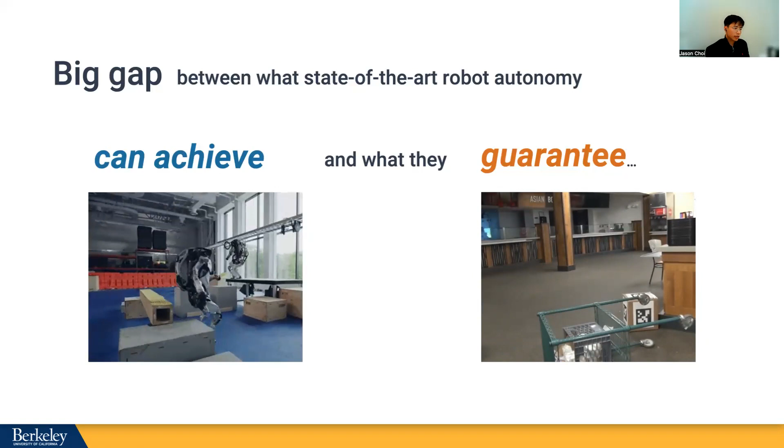I think for the audience of this class, I don't have to spend too much time motivating why safety is important, but this is just my short statement of why I want to work on safety problems. Working on robot autonomy is really exciting these days because you can see robot autonomy achieving a lot of cool tasks, like the videos Boston Dynamics have. But I think a crucial gap that is missing, and the reason we don't see a lot of robots around us until now, is the gap between what robots can achieve and what they can guarantee. I'm not sure if this video already played.

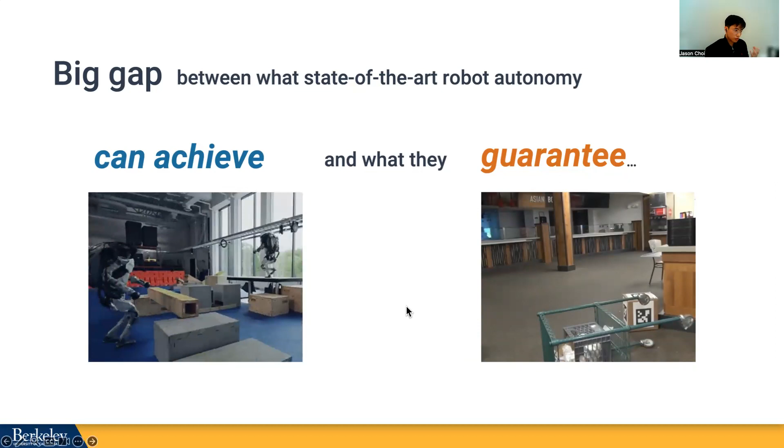To be fair, these videos are both quite outdated now, and these clips are just to make my point. A lot of the time people try hard to make some task achieved, but then sometimes they can achieve it, and sometimes they cannot—sometimes they violate safety constraints. This gap between what they can do and how reliably they can do things is the main impediment to the success of robot autonomy.

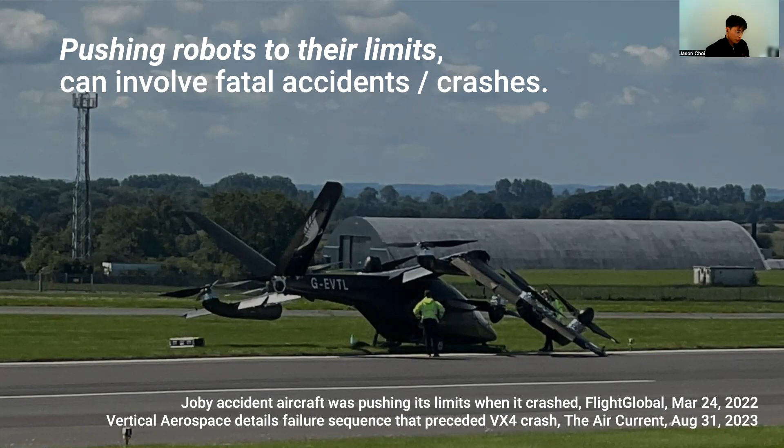I also work on control, or flight autonomy problems, with NASA these days, but there are these new generation eVTOL vehicles which involve more complicated aerodynamics because usually these vehicles have some changing configuration. They have a vertical propeller when they take off, and then this propeller tilts down when they transition to cruise mode flight. When these vehicles are pushed to their limits, they're much more vulnerable to failure, and these kinds of accidents do happen for these vehicles. So guaranteeing safety for these vehicles is really, really important because they are safety critical, and it costs a lot of money for the companies.

So safety assurance for advanced robot autonomy, I think, still remains an open problem. This has been my core research statement throughout my PhD. There are many aspects of advanced robot autonomy, but today I want to focus on two aspects of it.

First, the complicated and uncertain dynamics of the robot—these days robots are becoming more and more complicated. Second, data-driven methods are being deployed more and more for decision-making in robot autonomy. Data-driven methods are, of course, already used a lot for perception and prediction, but they're also being used for decision making. I'm also going to talk about why they have to be used for decision making later in my talk.

So when we incorporate these data-driven, learning-based methods for decision making, how do we ensure safety? That becomes a really challenging problem. These two aspects are the main aspects I want to focus on today.

My talk will consist of two components. The first being control theoretic design—there will be no data-driven components here. There are various methods proposed in the community to achieve safe control design, including Hamilton-Jacobi reachability, control barrier functions, and predictive safety filters. I don't think I'll have enough time to cover all of them rigorously, so I want to focus more on the outlook, the overarching view of these methods. This is based on the survey paper I wrote with Melanie's group and Professor Aaron's group.

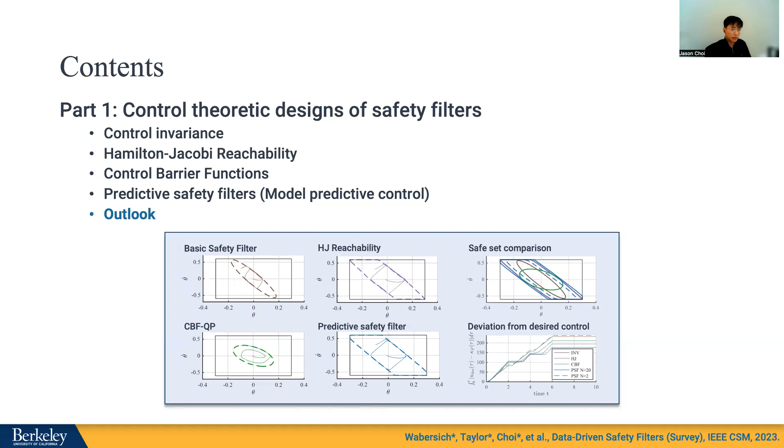The second part will be more about introducing my research—the data-driven component to deal with the uncertain dynamics of the robot. I'll talk a little bit about the GP-CBF SOCP safety filter, and I'm going to spend a bit more time introducing my new work on the discriminating hyperplane-based safety filter. That will be the last part of my talk, and then I'll wrap up with some key takeaways.

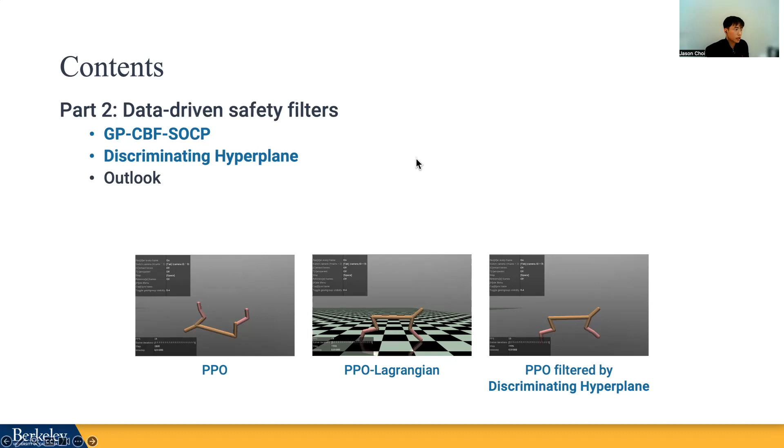So the first part of the talk will be control theoretic designs of safety filters. This is a collaboration with Kim Wabersich and Professor Melanie Zeilinger from ETH, and Andrew Taylor and Professor Aaron Ames from Caltech.

So safety filter—I guess I have to first explain what a safety filter is. In a word, it's a module in the control system that filters out any unsafe action and only applies safe action to the real system.

There might be some other module, logic, or algorithm that determines what is the desired control action the robot wants to take. It can be a learning-based policy, it can be some MPC controller, it can even be a human command. And the safety filter always lies as the last layer of this decision-making pipeline.

And if that desired control is for some reason unsafe, it overrides it with a safe action. So that's the role of the safety filter.

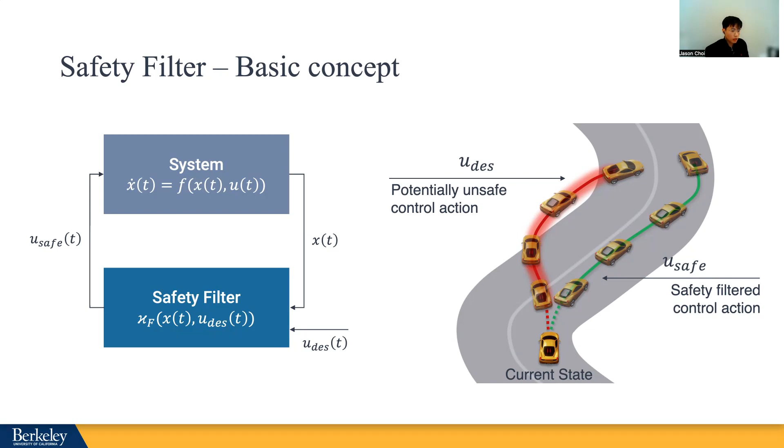I'm going to just try to mathematically formulate what this filter does.

There are three key objectives of this filter. The first one is, because it is a filter, it tries to minimize deviation from the desired control. Because if the override is too conservative, or overrides too much, it might deteriorate the performance objectives of the control. This is a very critical issue with safety filter design, but it will not be the main focus of today's talk.

My main focus will be more on how we ensure the safety constraints. This is the main role of the safety filter, which is to make sure that the state at all times satisfies the safety constraint specified by the designer.

So this can be a constraint because the robot doesn't want to collide with others, or for a flight vehicle, a constraint because the vehicle doesn't want to lose its stability or things like that.

And finally, the robot always has to take action that is only physically feasible, so it has to select its action from an admissible control signal set. So these are the main components.

One last comment about the safety filter is that I'm not trying to propose this as the single way of approaching the safety problem, because in a lot of cases, performance objective and safety objective have to be considered together. But for today's talk, where I want to focus on the safety problem, the safety filter gives us a nice framework where we can think about the safety problem decoupled from performance. So the safety filter has some way of minimizing its deviation from the performance goal, but still prioritizes safety.

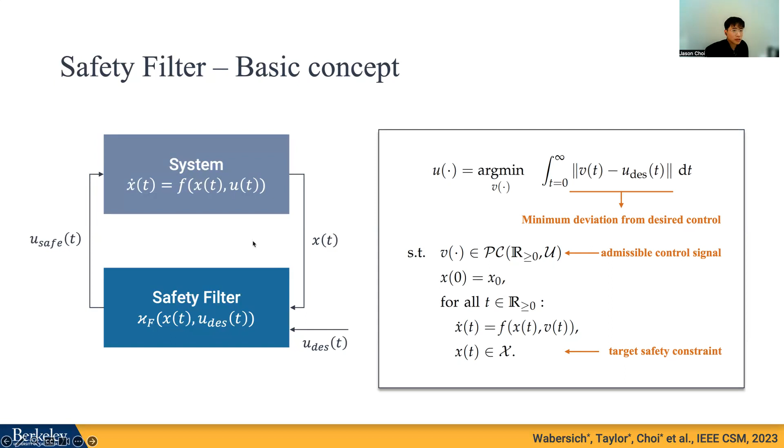So the next thing I want to discuss is how we design these safety filters. From my point of view, there are fundamentally two problems when we design a safety filter.

The first problem is verifying a set of safe states. The designer gives you a safety specification for when the system is unsafe and when it is safe. The naive approach is that as long as the set is given as set X, whenever you're not outside of this set X, you're safe. But actually, that's not the case, because there are some states inside set X where exiting the set X in the future is inevitable.

So right now you're still inside this set X, but whatever control action you select, at some point in the future, those states might lead you to the failure region. So the main goal has to be ruling out those states, and to come up with a subset of the target set X, denoted as S, that is verified to be safe. That's the first problem.

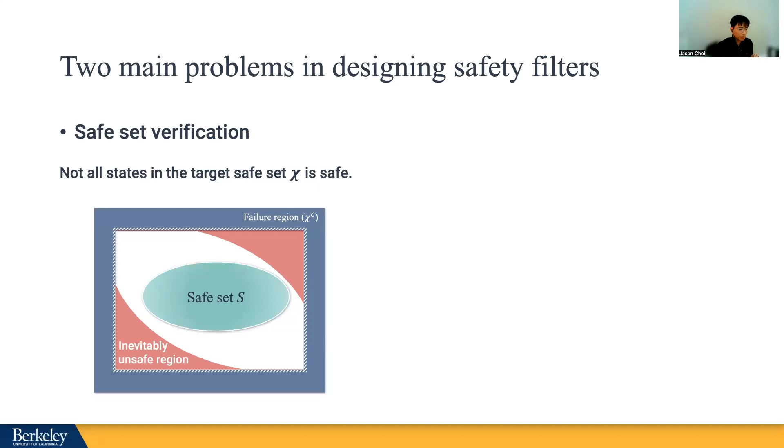The second problem is then, once we verify this set, how do we achieve this through control design? It can be a control design, or a constraint applied to the control input, which is more the case in safety filter design. These are the two main building blocks for designing a safety filter: on one hand, we verify the domain in which we can remain safe, and on the other hand, we select a control signal that achieves this. So we'll think about the safety filter design problem by distinguishing these two problems.

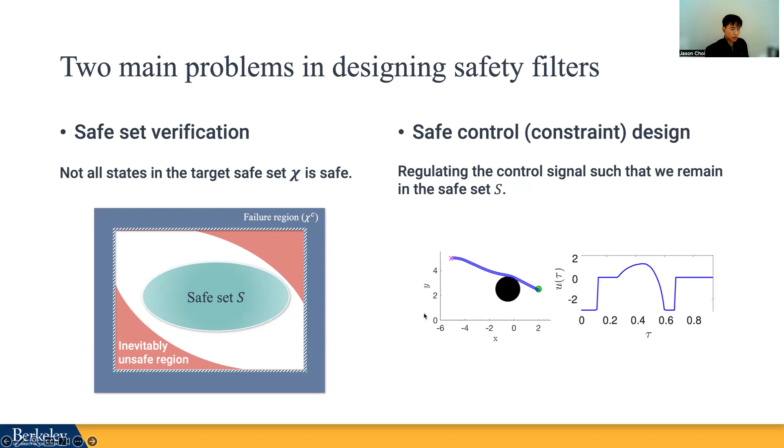So what would be a good candidate for the safe set S is where the notion of invariance emerges. Set invariance is the most fundamental principle to ensure safety and to design this safe set S. I'll first give you a definition of forward invariance, control invariance, and Nagumo's theorem.

Forward invariance is defined for a closed loop system or an autonomous system where there's no control, or the controller is already specified. If there's a set S, and for all initial states inside the set S, the trajectory stays indefinitely inside that set, then you can call that set a forward invariant set. Basically, the trajectory starting inside that set remains forever inside the set.

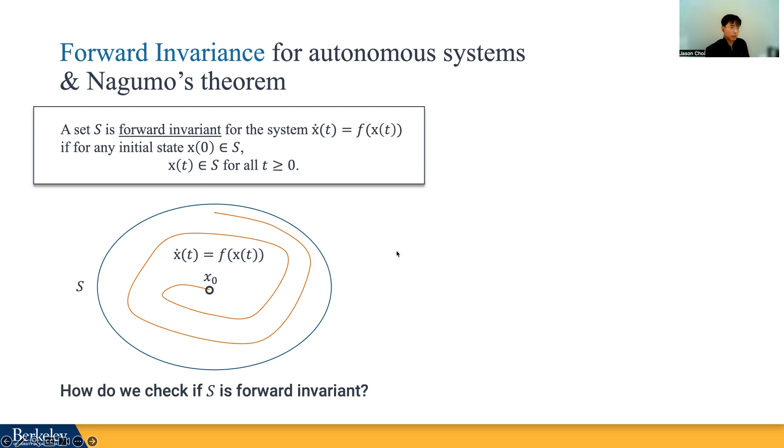A nice way of verifying whether a given set is forward invariant is to check the boundary of the set. When we check the boundary, we get help from an implicit distance-like function that describes the set, which you can call an implicit function, or a signed distance function. Given this function h, the set S is described as the super zero level set of h. So when we check the boundary and check the derivative of h along our dynamics f...

...if this derivative is always greater than or equal to 0 on the boundary, then because of this derivative condition, once the trajectory hits the boundary, immediately at the next time h has to be non-negative, which means the state will still be inside our super zero level set, which is our set S. So that gives a principle that the trajectory will remain inside the set, and this could be a condition we use to verify whether a set is forward invariant or not.

This is called Nagumo's theorem in the literature, and this condition is called Nagumo's condition. In the end part of my talk, I'll come back to this condition, so it will be quite important throughout my talk.

And also, as many of you who are already familiar with the concept of control barrier function might know, this is also very useful to define a CBF.

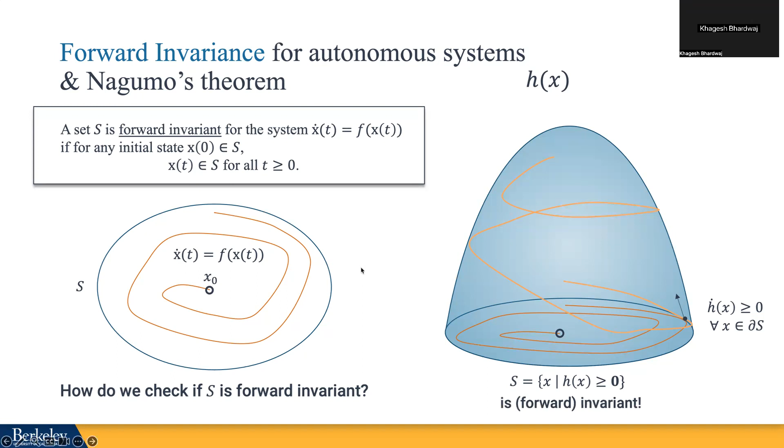We'll extend this notion to the control system. Now we are thinking about our system in an open loop fashion, where we're trying to select the control signal. The extension of the forward invariance concept to this control system is control invariance. A set is called control invariant if for any initial state inside the set S, there exists a control input signal defined in the future that drives the trajectory to stay indefinitely inside the set S, for all time greater or equal to 0.

Before we didn't have the notion of control, so it was a deterministic notion. Now the notion becomes one of existence—we introduce the existence of a control signal to the invariance notion. Nagumo's condition can similarly be extended to this control system. When you check the boundary condition, you check whether a control signal exists that renders the derivative of the h function non-negative. If you can always find such a control input at any point on the boundary, then once the trajectory hits the boundary, applying the control input that satisfies this condition will push the trajectory back into the set.

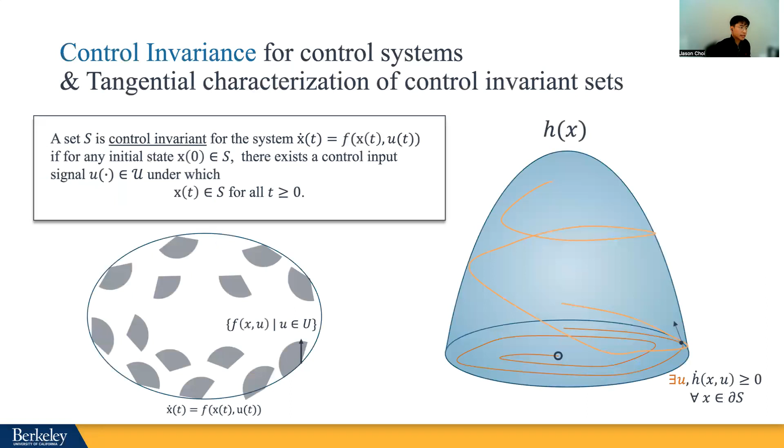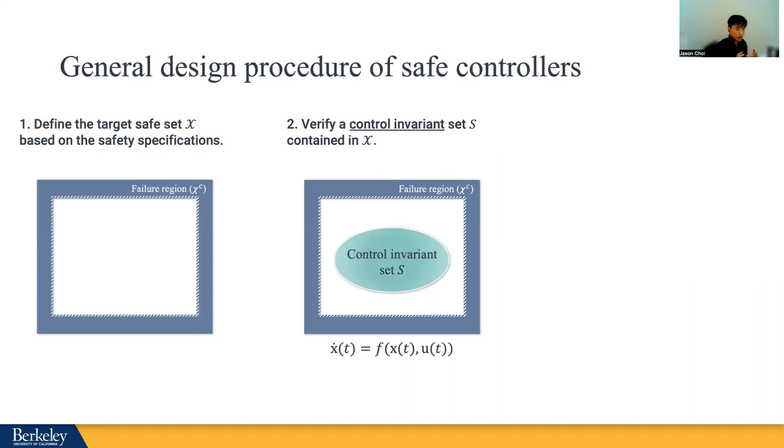So that's the way you can guarantee the trajectory can stay inside the set. That's the notion of forward invariance and control invariance sets. With that notion, just to recap how we would go about the design of safe controllers: given this target safe set, we'll verify a control invariance set contained in this set. Once we verify this control invariance set, we can design a safe controller so that under the closed loop dynamics, the set will be forward invariant.

Just to clarify the notion of control invariance and forward invariance—steps 2 and 3 can also be tackled together, verifying the invariance set together with the safe controller. But if you think about the open loop system, you're trying to find this control invariance set, and then associated with that, find a safe controller so that under that closed loop system, your set becomes a forward invariant set.

Okay, so now let's see how we can achieve this with Hamilton-Jacobi. Silva, have you covered reachability in your class? Great. Yeah, but it doesn't hurt to have another person explain. I'll be quite brief.

Since you already covered this in class—in reachability there are many types of reachability problems, but now I'm describing the specific type designed to verify a maximal control invariance set contained in the target set. The objective here is to avoid the failure region, or unsafe region, for all prescribed future time horizon. In order to do that, we think about the notion of the inevitable backward reachable set of this unsafe region. Here we set this failure region as our target set.

And then we compute the inevitable backward reachable tube, which captures all states such that, no matter what control action you take, it will inevitably reach the failure region at some point in the future. So the BRT will include all states like that. The complement of that set is called the viable kernel, because by definition, inside this viable kernel there will always exist a control signal that prevents you from exiting X, at least for the given time. That's how you would compute this.

That's what you want to compute: the inevitable backward reachable tube of the failure region. Together you compute this safe set, which is a finite time notion. If you extend t to infinity, you get the infinite horizon safe set, which becomes our maximal control invariant set.

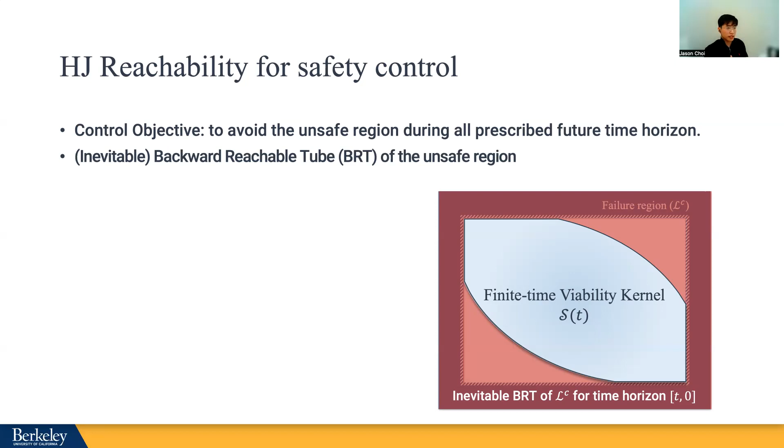Here's how you do it. You define the value function of the optimal control problem, derive the dynamic programming principle of the value function, and from that derive the Hamilton-Jacobi PDE of the value function. Once you can solve this PDE, you can solve the value function, and as a result the level set of the value function will characterize the BRT.

From that, if you verify your optimal control by evaluating the Hamiltonian, this gives you the kind of optimal safety controller that always pushes the state away from the boundary, so that V dot becomes greater than or equal to 0.

To get the maximal control invariance set, you run the computation for long enough until the value function converges. Then you get the infinite horizon value function, and from there you can get rid of the time notion and the time derivatives, giving you a time invariant optimal control law.

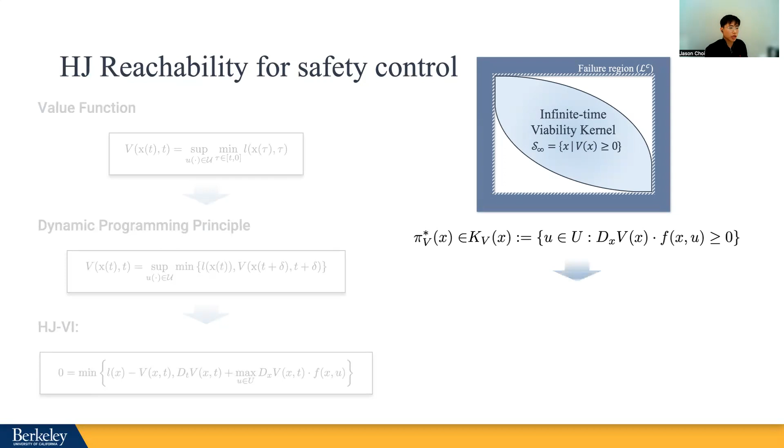Once you have this optimal control law derived from the value function, the most vanilla thing you can do to design a safety filter is: whenever your value function is very close to 0, meaning you're about to exit this viability kernel, you override your control action with the optimal reachability-based safety control.

Otherwise, when you're strictly inside the set and further away from the boundary, you're allowed to do whatever you want, so you can just take your desired control. That's the most vanilla form of the reachability-based safety filter.

I have an example here where I'm going to show how the reachability controller looks like. Any questions before that?

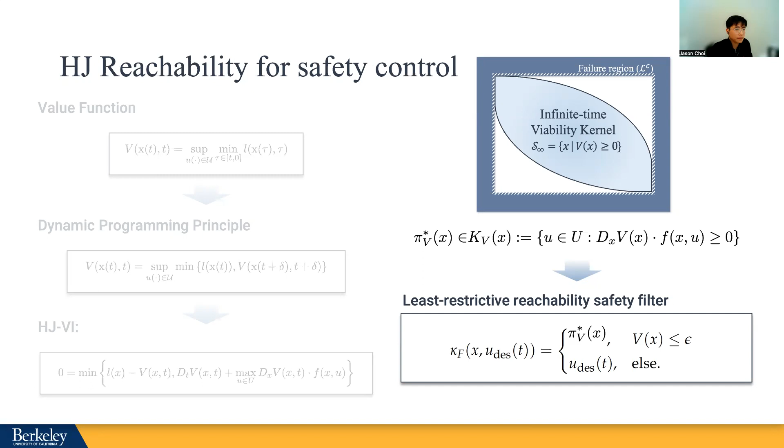Here is a very simple inverted pendulum example. We have an input bound and a target safety constraint, which constrains our angle to stay within some region around our equilibrium point. Let's say some user gave us a desired control input.

This is a bang-bang type of control for the first 6 seconds, and then after that it will use some feedback stabilization controller to come back to the unstable equilibrium. This bang-bang control will almost immediately push the system outside of our target safety constraint.

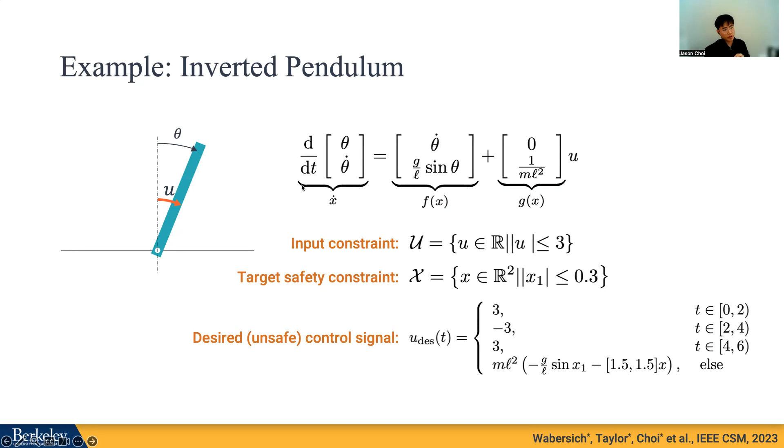For this example, let's see how we can do the reachability-based safety filter. I actually added some constraint to theta dot when I computed the viability kernel. I'm not showing how I computed it, just directly showing you the result. The dashed line is the boundary of the viability kernel of the targets used for the computation, so inside the dashed line is our maximal control invariance set.

Starting from the initial state, whenever the trajectory hits the boundary of this invariant set, the reachability optimal control kicks in and prevents it from exiting that set. So you see this kind of jump between the desired control signal. The red lines are the desired control signal, and the purple lines are the overridden control signal.

The reachability control kicks in whenever it's violating the safety, like trying to exit the viability kernel, and it prevents the trajectory from exiting the safety domain, successfully converging back to the equilibrium point.

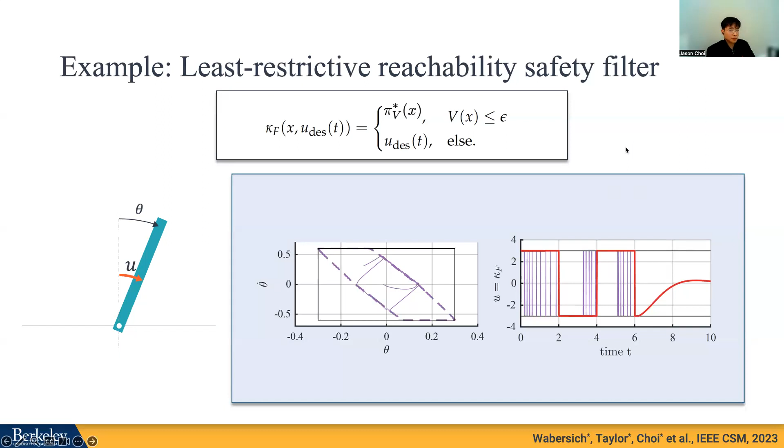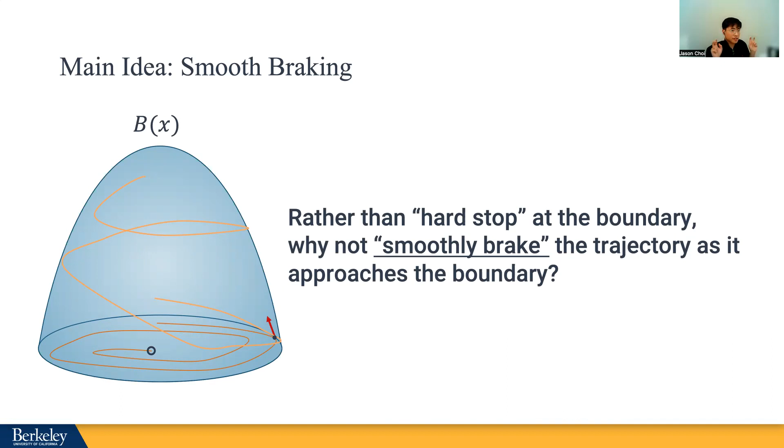Okay, so CBF's main motivation is, rather than doing a hard stop at the boundary like what we did in reachability, we will try to smoothly brake the trajectory as it approaches the boundary. And here I think we can go back to the question: we'll use a design principle inspired by the Lyapunov stability condition. Because if you recall the Nagumo theorem, it only defines this hard stop when the trajectory actually hits the boundary.

So the idea of CBF is, even before we hit the boundary, we underbound our CBF evolution with some exponentially decaying curve, a smooth curve that approaches 0, so that if we ensure the trajectory always stays above this exponentially decaying curve, then we can ensure that the CBF value always stays positive. And because of that, the trajectory will remain safe.

So a CBF is defined as a continuously differentiable value function such that, I'll skip the minor details, if this condition is met for all states inside our invariant set, or the super zero level set of the CBF, then we can ensure safety. And maybe I'll go back to the question. If we compare this to the Nagumo condition, in the Nagumo condition we don't have this term, and in the CBF we have this term.

But the important thing is that at the boundary of the set S, the CBF value will be 0. So the CBF constraint becomes the Nagumo condition, and that actually proves why CBF would guarantee you safety. Did that answer your question?

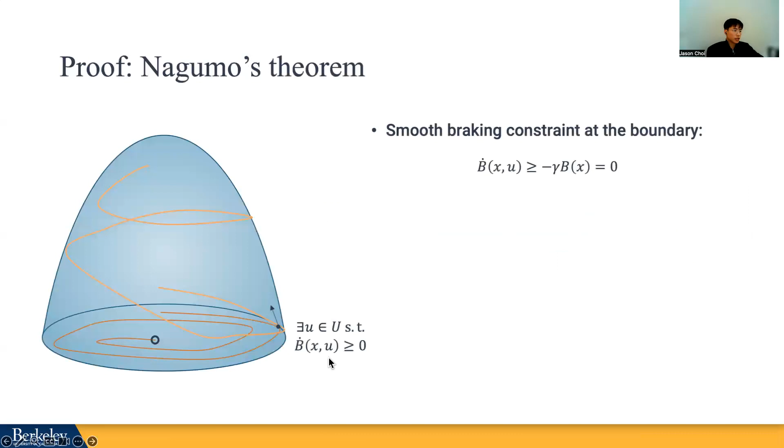I'll skip this. And we'll think about control affine systems for a minute, because for control affine systems, we have a nice structure that the dynamics is affine in u.

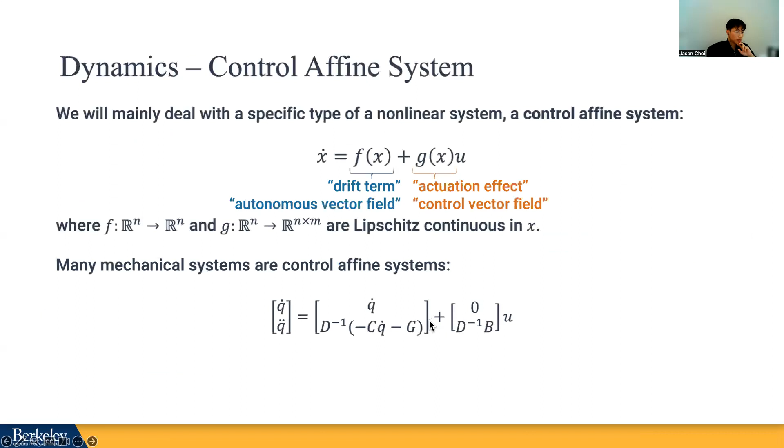So as long as our objective function is quadratic and our other constraints are linear, we have a quadratic program. And even if our other constraints are not linear, as long as they're convex, this becomes a convex program. So in general, the safety filter can be formulated as a QP problem. And this is quite a compact QP problem.

There are not that many decision variables. The only decision variable is your control input u. So this is a QP problem that can be solved really fast online. And this CBF QP design itself explains why CBF has been really popular these days, because the design of the safety filter is made really easy. But the caveat again is that this only works for control affine systems.

And if the constraint is not satisfied, you can just relax the constraint in practice so that you don't have to worry too much about the infeasibility. But the caveat is that infeasibility may happen if your CBF design is wrong. So if your CBF design is rigorously validated, then that shouldn't happen inside your safe set.

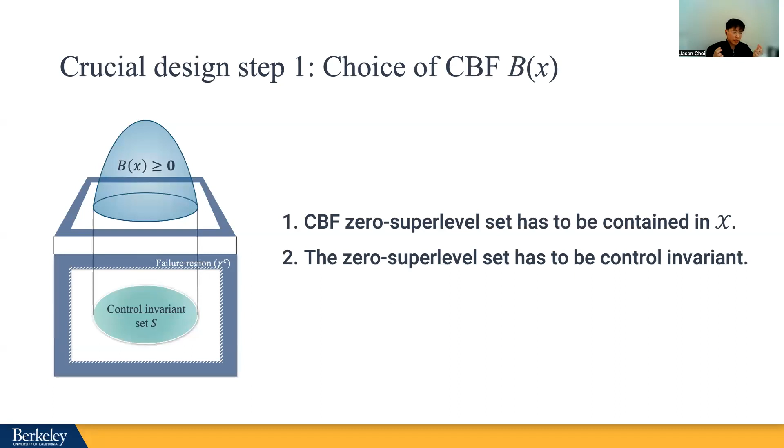So the design step of the CBF would be you design the CBF and you verify that the zero-superlevel set is control invariant, and also it is contained in your target safe set X. And then you choose a gamma, or in general, you choose the comparison function you want to use to underbound the evolution of the control barrier function, which will decide the profile of the smooth braking.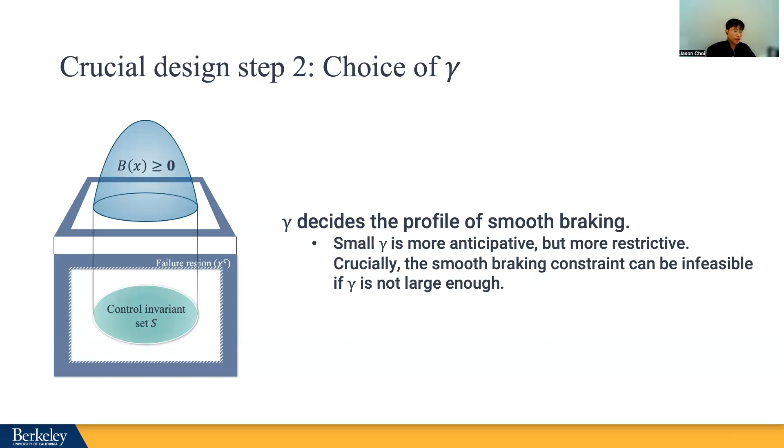So the caveat here is that if the gamma is small, this becomes a more restrictive condition. If gamma is larger, then you will alleviate some conservatism, but then the braking will be more aggressive towards the end when the trajectories are about to hit the boundary. So larger gamma is less restrictive, but it can be more myopic. Let's see what happens here.

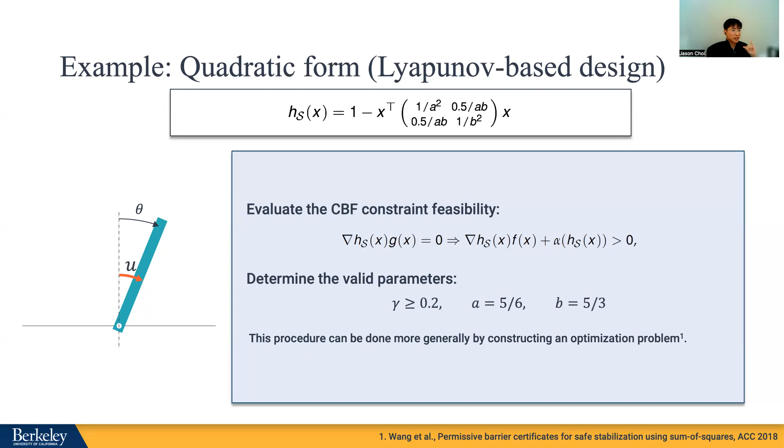So here, I use a CBF that has this quadratic form, and this is a very typical choice of CBF because we can use a Lyapunov-based principle to come up with this CBF. That's exactly what I did here, because if you flip the sign of the CBF and you shift it, it's basically the quadratic Lyapunov function defined around the unstable equilibrium point. I'll skip how we derive the specific values for this, but this design step has to be taken rigorously so that the resulting invariant set is valid.

So the light blue ellipse here is the boundary of the CBF zero level set, which is our safe set region S. And in this case, I'm showing you a trajectory under the CBF QP when I choose the gamma, the comparison function constant, to 0.2. And you can see that the filter smoothly intervenes in the desired control signal and makes sure that it doesn't hit the boundary.

And you can see that the control signal is much smoother than the reachability-based control signal. And you can also see here that the CBF value is staying positive all the time. Now, when you choose a larger gamma, you can see the effect of gamma, because the value of the CBF now can become much closer to 0. It still doesn't allow it to hit exactly 0 because of the CBF constraint. But now the filter became much less restrictive.

But in some sense, it became a little bit more myopic because the filter kicks in when the trajectory is very, very close to the boundary. So I think that's the CBF, and I'm going to quickly move on to MPC.

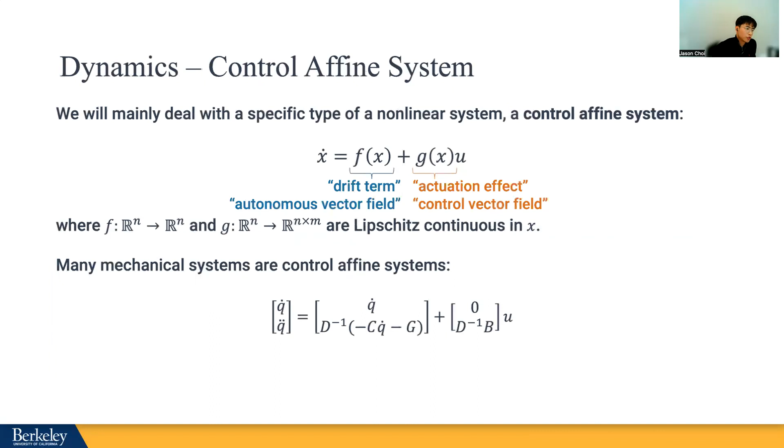Any questions? Yeah, you keep giving us this caveat of if the CBF is correct. Can you comment on how difficult that may or may not be? So we could go back to the CBF condition, which, according to the definition, has to be satisfied to be a valid CBF.

So checking this condition when there's no control bound is not too hard because in your Lie derivative, the term that depends on your control input, as long as that term doesn't vanish, as long as it's non-zero, you can take however big a control input to satisfy this condition.

So in the case there's no control bound, this is a little bit easier problem. In the case there is a control bound, this becomes a very difficult problem, and it almost becomes a reachability-like problem with control bound. Actually, Sylvia and I and some other colleagues have worked on using reachability to design the CBF. But in general, I feel like it's still an open question. So there is a lot of ongoing work, like trying to learn CBF or design CBF from data, or a variety of methods that people are trying to design this CBF.

So is there anything you want to add? No, thanks. All right, thanks.

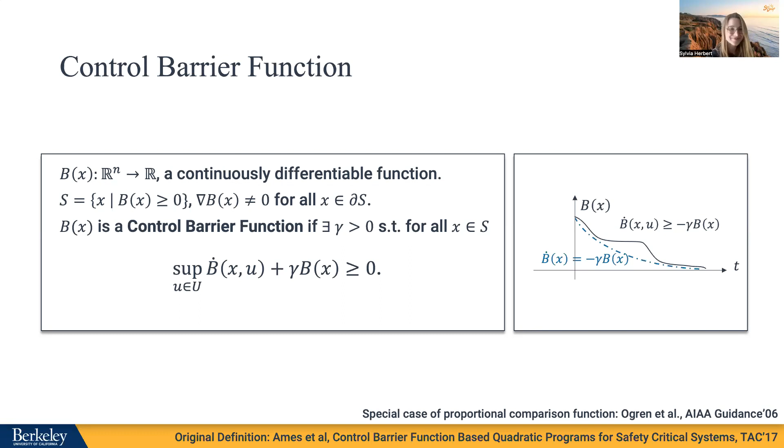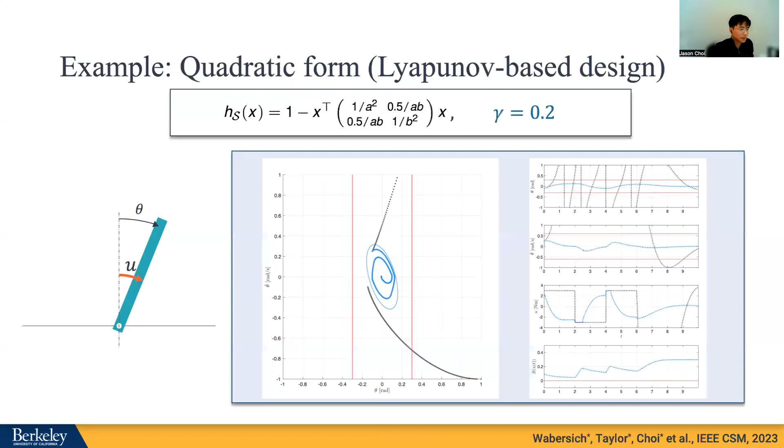So MPC, I think I should maybe move fast. But here MPC is basically we work with a discrete time formulation. So first we discretize the dynamics, and then we formulate a predictive control problem. And there are mainly 3 components here. So we have some desired control. Again, the desired objective is just to make sure we minimize the deviation from the desired control.

But there are 3 constraints. One is the target safety constraint, which is obvious. We have the input bound, which is obvious. But the most non-obvious one here is the terminal set constraint. And this terminal set constraint is quite crucial for this predictive safety filter.

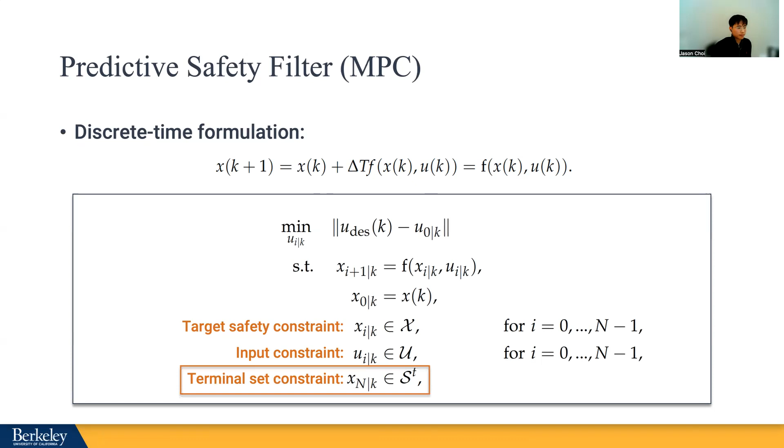So what is it doing? Let's see. We will consider a terminal set denoted as ST, which is already designed to be control invariant. But this control invariant set might not define the whole safe set domain. This might be just a very conservative control invariant set, for example, around the equilibrium. And with this terminal set constraint, after n steps of the horizon, we always make sure that the trajectory ends up in that terminal set.

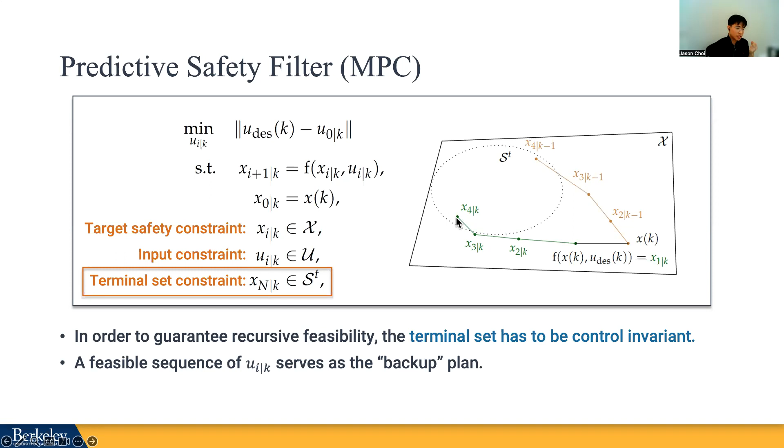Then what we can ensure is that once the trajectory ends up in that control invariant set, since the terminal set is control invariant, it can stay inside that set forever. This is kind of like a backup safety mechanism. So as long as the MPC solution is feasible, we know that there exists at least one trajectory that will indefinitely be safe. That's why the terminal set constraint is a very crucial constraint that ensures safety of the predictive safety filter. And this feasible sequence of U, determined by solving the MPC problem, serves as a backup plan for our safety mechanism.

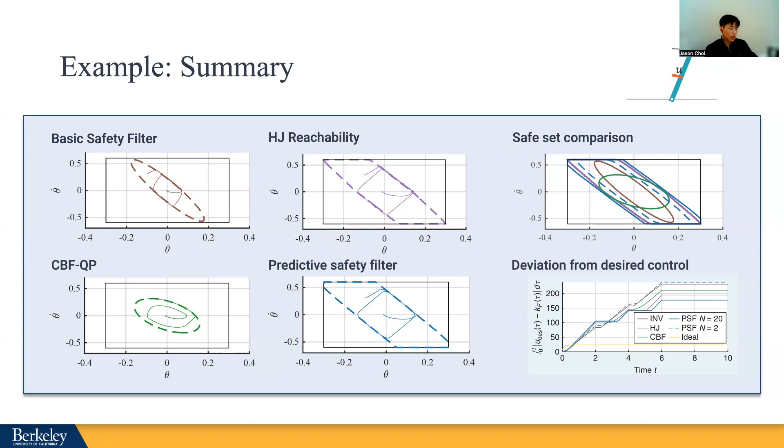So I think that's the summary, that was the overview of each individual method. But I would highlight a key overarching theme here.

So first, reachability and CBF rely on some notion of certificate function. And the certificate function—maybe there is a question in the chat. So how was the goal defined for the MPC safety filter?

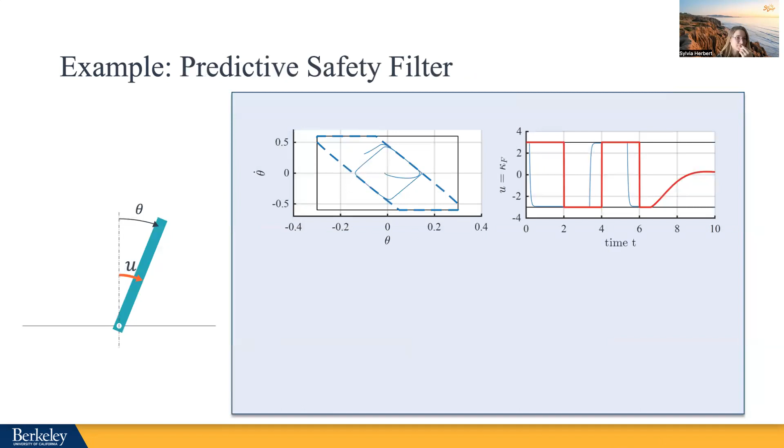How would it behave if the MPC goal ended up being in the unsafe set? And when you say goal, do you mean the terminal set? Seems like the performance goal. Oh no, never mind, the terminal set. Or it seems to me like it's saying the goal for the system is inside an unsafe set—what would happen? Oh I see, if the goal is inside the unsafe set, it means you cannot achieve the goal. Basically the goal is wrong.

The goal could not be perfectly achieved, but is there a way this filter would behave in that case, a particular way? So you mean like a goal point is somewhere, let's see. Sorry. If I can rephrase my question—if the design control policy is to, let's say, hit an obstacle, a safety filter would step in and try to avoid doing that, but it will also try to minimize the difference between the... oh I see, like a conflict between the constraint and the objective function.

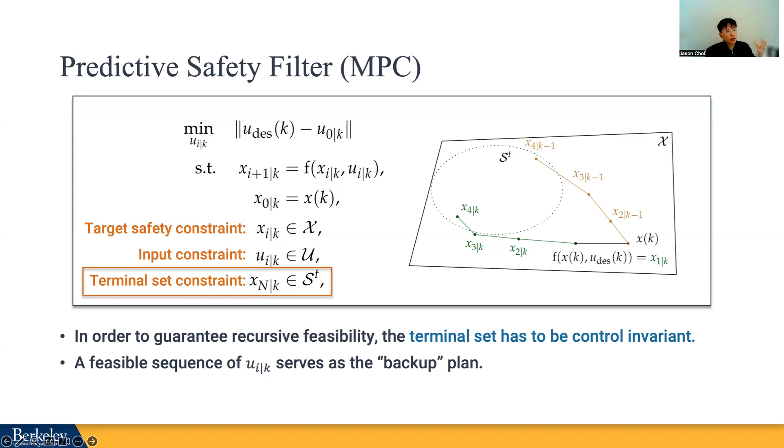Right, but I would say if the constraint is like a hard constraint, the MPC would always prioritize the hard constraint. So what I'm guessing would happen is the trajectory will always try to stay close to the goal, but it will still be prevented from hitting that goal. Similarly to what happens here—you see this MPC trajectory sliding along this boundary. This boundary doesn't exist explicitly, but it just slides along this boundary, and this is determined by the feasibility of the MPC problem. The feasibility of the MPC says if you're here, you can never exit this boundary. So I think something similar will happen—your trajectory would slide along the viability kernel boundary that is close to the goal, neighboring the goal, but you will never exit that boundary. I see, okay, got it. Thank you. Yep, thanks, that was a good question.

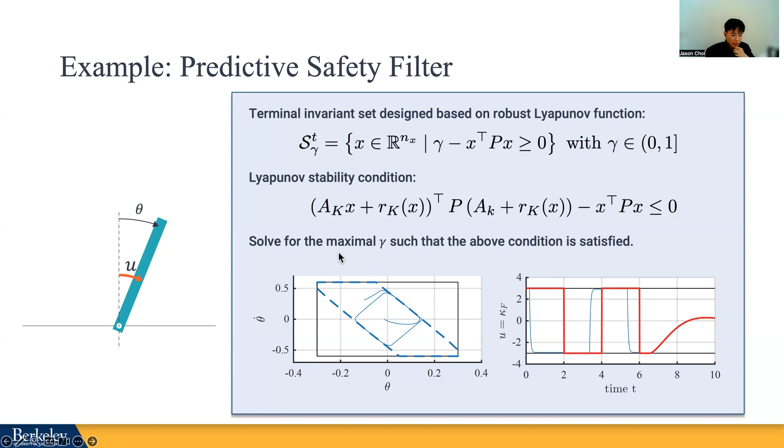So the CBF and the reachability methods both rely on some notion of certificate function. This is a single scalar function that combines the information of our desired safety constraint and the long-term effect of the dynamics. Usually this scalar function's level provides the safe set verification, and it could often also provide a measure of safety margin, which is the case for CBF. And the gradient provides the direction of the safety control, or the direction to which the system can become more unsafe or safe. So that is the core concept of both the reachability value function and the control barrier function.

And there's a nice survey about this unified view of safety filter design with the certificate function.

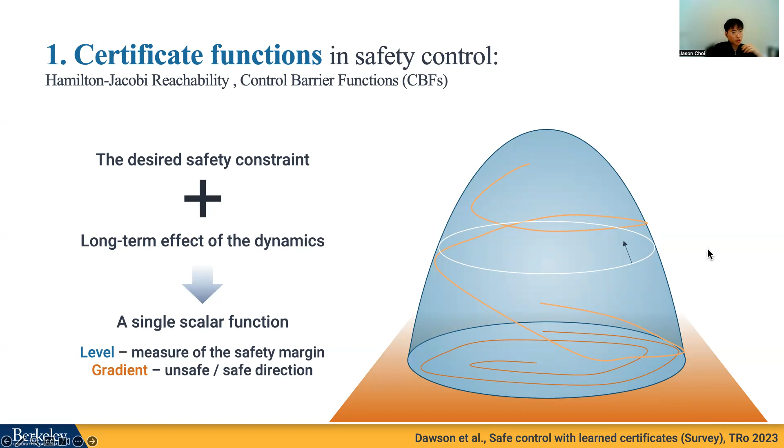But the commonality of all three methods is basically the control invariance set. And I feel like I'm emphasizing this too many times, but again, in the reachability case we are explicitly constructing the maximal control invariance set contained in our target set through dynamic programming and by solving the Hamilton-Jacobi PDE. In the control barrier function case, the design of the control barrier function is this process of finding the invariance set. And in the MPC case, designing the terminal set and constraining the problem to have the terminal set constraint ensures that the trajectory always stays inside some control invariance set, albeit that set being implicit.

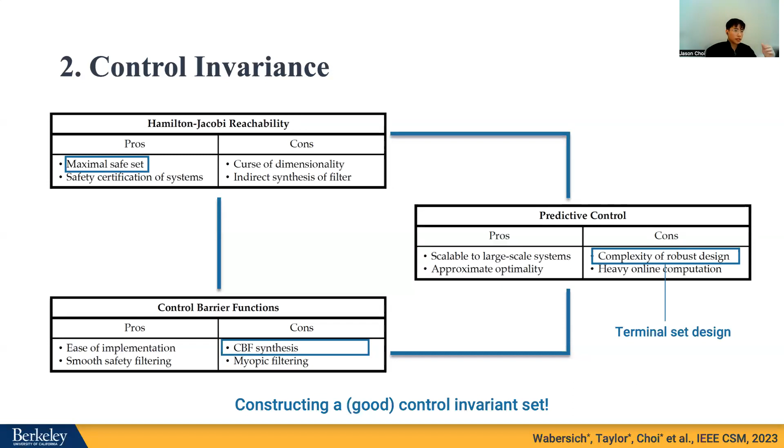I saw the talk from last week. Is it last week, Sylvia? From Yuxiao Chen? Yeah, so I saw that he mentioned he kind of talked about backup CBF.

I would say backup CBF kind of unifies the control barrier function-based design principle and the MPC-based design principle really nicely, because the way he used this kind of backup invariance set is very, very similar to how the predictive filter used the terminal invariance set, the terminal set.

So both methods have this implicit notion of control invariance set, and it actually can ease the control invariance set design problem a little bit. You don't have to explicitly find a control invariance set anymore, but it does still rely on a set like the terminal set.

The last point I want to make is that all three methods are based on control theory and a mathematical model of the system, model-based control design. So when we start to think about uncertainty in the system dynamics, we have to make sure these methods work under that uncertainty.

For all three methods, they have an extension to robust formulation. So in reachability, we extend this to differential game between control and disturbance. The control barrier function itself has some inherent stability notion, but there's also a notion of input to state safety.

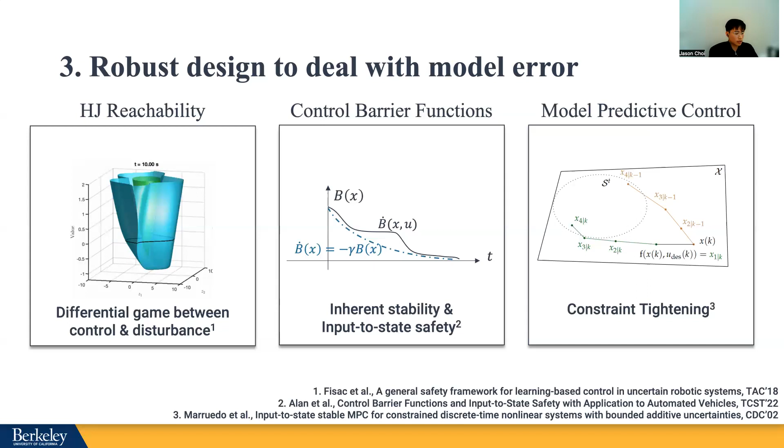So how much time do you have? Like 30 minutes, maybe? Yeah.

Okay, so model uncertainty, I guess again I don't have to spend too much time on this, but basically model uncertainty always exists for real-world systems. Because we always use some mathematical model to describe the system, but the actual system might have some discrepancy.

In the notation, we'll refer to the nominal model with F tilde vector field and G tilde vector field, and we'll refer to the true plant as F and G. This mismatch between F tilde, F, and G tilde, G exists for most systems, and that would break down the safety guarantee if we designed the safety filter only with F tilde and G tilde.

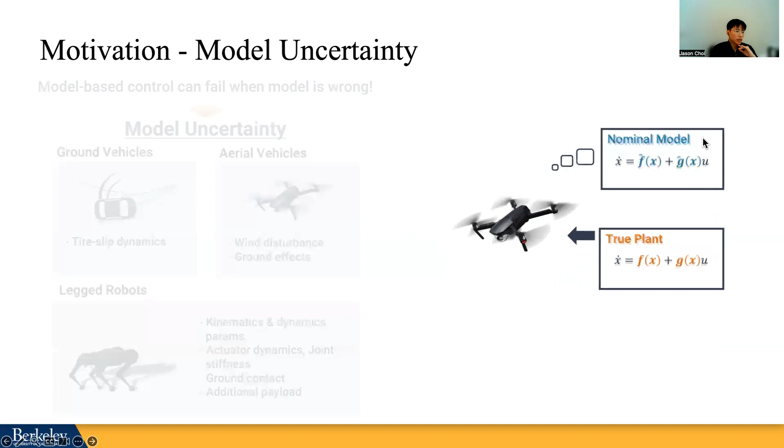So I'll show you an example here. This is an experiment I've done for the GP-CBF SOCP safety filter. When we designed the CBF QP filter, we used the mathematical model provided by the manufacturer of this cart pole, which should be quite accurate.

So it means that this mathematical model is not perfect, or it doesn't describe the system dynamics accurately, and it results in this CBF guarantee failure. We eventually fixed this by introducing a data-driven component that learns how the uncertainty affects this safety constraint, which is why we call this GP-CBF SOCP filter a model uncertainty-aware safety filter.

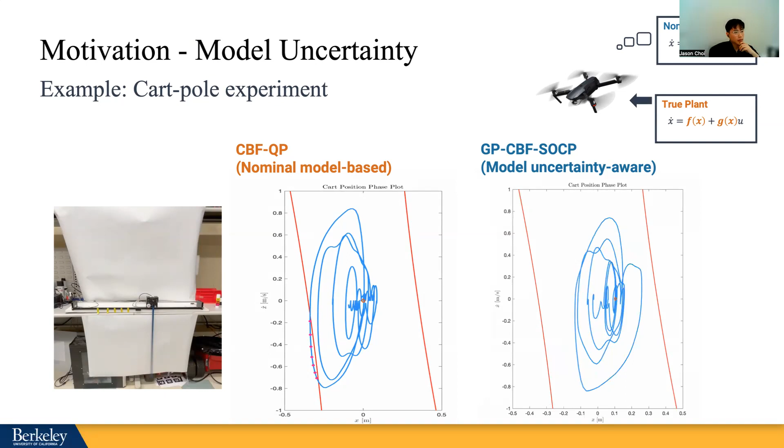Also watch Armin's lecture, he briefly introduced these SOCP filters, so I won't spend too much time on that. And since he gave a nice introduction to Gaussian process regression, I'll also not spend too much time on that, but I'll spend time on where we applied GP regression.

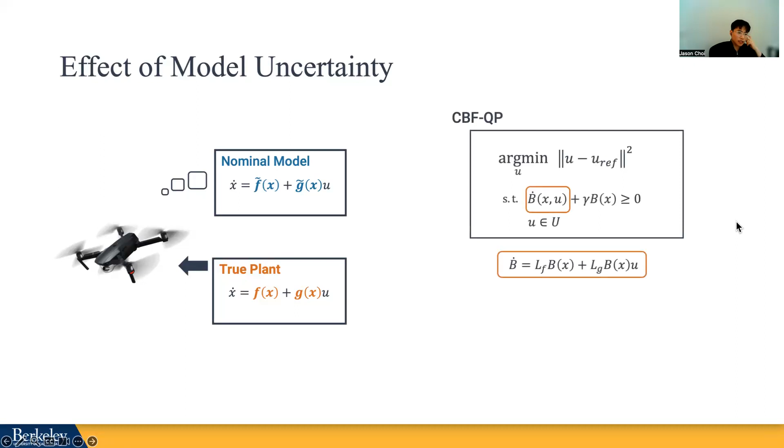Usually a lot of people use GP to model the uncertainty component of the dynamics directly, but here we did not do that. Let's look at the CBF constraint. There's this B dot term, which is the slope of the CBF along our dynamics, so it's LfB plus LgBU.

But we don't have direct access to F and G, the true ground truth plant dynamics. We only have model-based estimates. So in our actual filter design, instead of using ground truth B dot, we use B dot tilde, our model-based estimate. There exists a discrepancy between the estimate and the ground truth value, the uncertainty term, which is the delta term here, and this delta term has an affine structure.

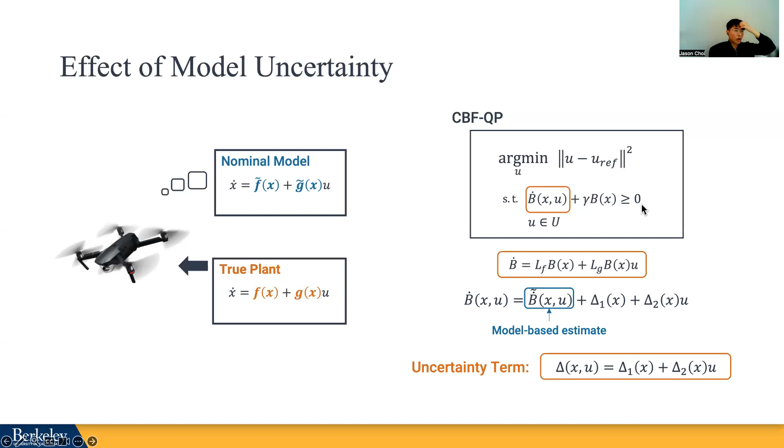So where we applied the GP is to learn this term, because this term basically explains how the uncertainty is affecting our safety. From the data we collected from experiments, we came up with a GP model to regress this uncertainty term in the safety constraint.

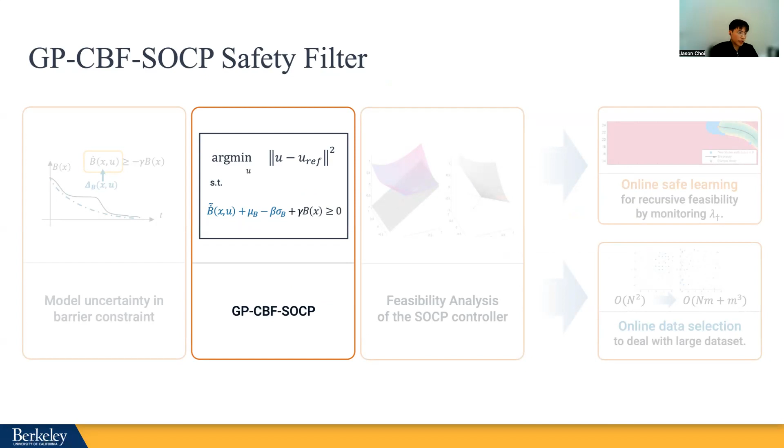Since Armin already provided a good overview of how GP regression is done, I'll skip that part. But he also gave a nice overview of the confidence bound property of Gaussian process regression. We're exactly using that here as well to provide a probabilistic safety guarantee of the designed filter.

After we have this GP model, we replace the original constraint with a chance constraint, represented using the confidence bound of the GP model. So we have a guarantee that the uncertainty term delta will stay within this bound, determined by the mean prediction of the GP and the variance of the regression.

The delta stays inside mu plus beta sigma and mu minus beta sigma with probability of 1 minus delta. This means the probability that our true Lie derivative B dot being greater or equal to B dot tilde, our model-based estimate, plus mu minus beta sigma, which is the worst case bound of delta, will be greater or equal to 1 minus delta.

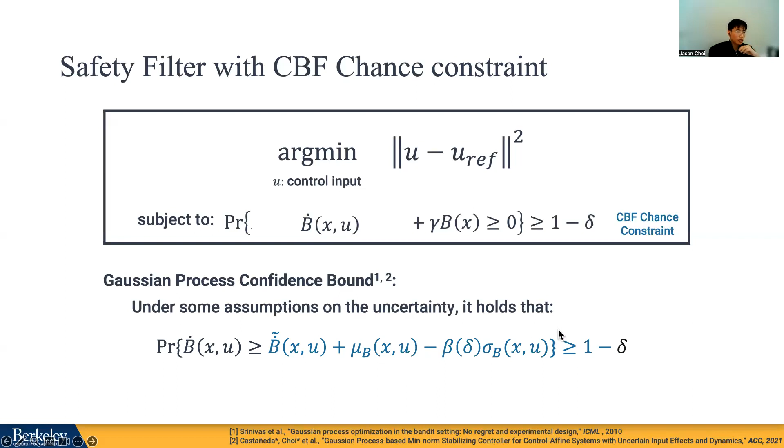So instead of B dot, we can use this lower bound to estimate this chance constraint.

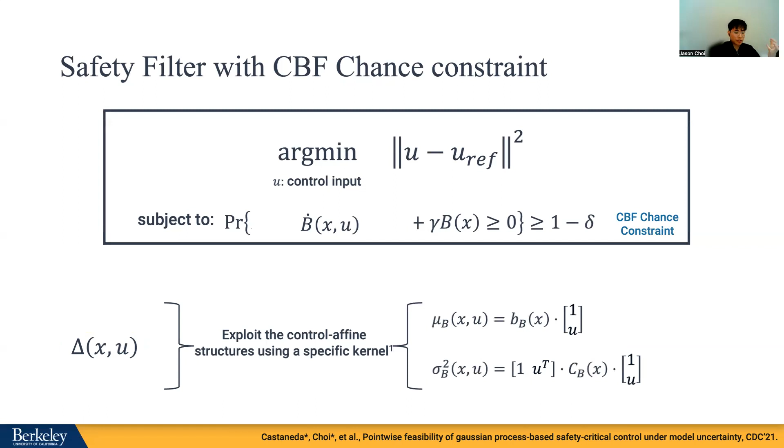One more technique we did: since we know the ground truth uncertainty term is control affine, we use a specific kernel structure that captures this affineness. Then the mean term becomes affine in U, and the variance term becomes quadratic in U. The mean term can be expressed like this, and the variance term like this. When we plug this expression into our constraint, the nice thing is that we maintain convexity.

So now this is no longer a quadratic program, but a second order cone constraint. This becomes a second order cone constraint because of this specific structure we use, so now this becomes an SOCP program, which is still a convex program, and it can still be solved really fast in real time.

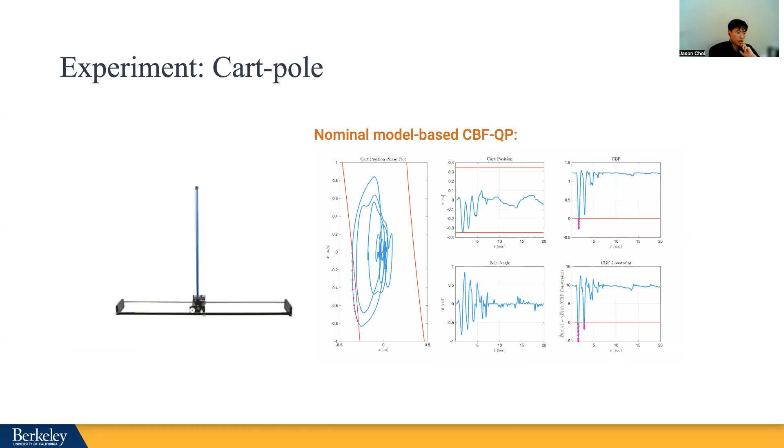So this is the gist of our filter design. I think I already showed you this, so I'll skip it. But in the GP safety filter, once we incorporate this GP model and replace our QP safety constraint, the vanilla model-based QP safety constraint, with our second order cone program safety constraint, we can successfully recover the safety guarantee of the filter.

Okay, any questions? I think I moved a little bit too fast.

The principle about how we use GP is already covered in the previous lecture, so you can consider our work as an application of that to our CBF-based safety filter design.

We did a more rigorous analysis of when this filter is feasible or when it is not. If we go back to the CBF QP, the CBF QP always has to be feasible if the CBF is valid. But for the SOCP filter, since we're learning the model uncertainty from data, let's say we had perfect knowledge of the uncertainty, meaning our data-driven model can perfectly estimate the uncertainty term, which means the sigma term is 0.

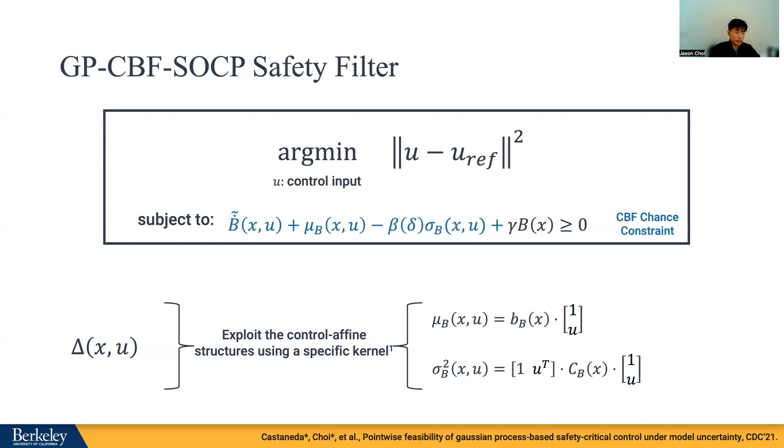In that case, this will again be like a CBF QP, because we don't have the variance term here, and it will always be feasible. But the problem with the SOCP filter is that it can become infeasible because of the sigma term, because the sigma term captures the uncertainty of the prediction model itself. The prediction model might have some error, and that error characterizes how uncertain the data-driven model is. If that error is too big, meaning we don't have enough data or information to characterize the uncertainty accurately, the sigma term can become really large, and the SOC constraint can become infeasible. That's why feasibility analysis of this constraint becomes even more important than the vanilla CBF filter.

So the feasibility analysis basically tells us that the control input determined by this SOCP filter doesn't just consider safety, but also considers what control action makes the GP model more certain, or less certain, based on the data the GP model uses for inference. So it trades off between safety and uncertainty, and that's a key principle of how this SOCP filter works.

By doing a more theoretical analysis of this, we can use those analyses to design algorithms for online deep learning, where we start with partial knowledge, or even zero data. Then online, when we execute this filter, we measure how uncertain the SOCP filter is about the dynamics and how the dynamics affect the safety constraint. When it is uncertain, it can use the measure lambda to take an exploratory action that is still safe but will improve the knowledge of the system dynamics. If we recursively do that, we can guarantee recursive feasibility of the system.

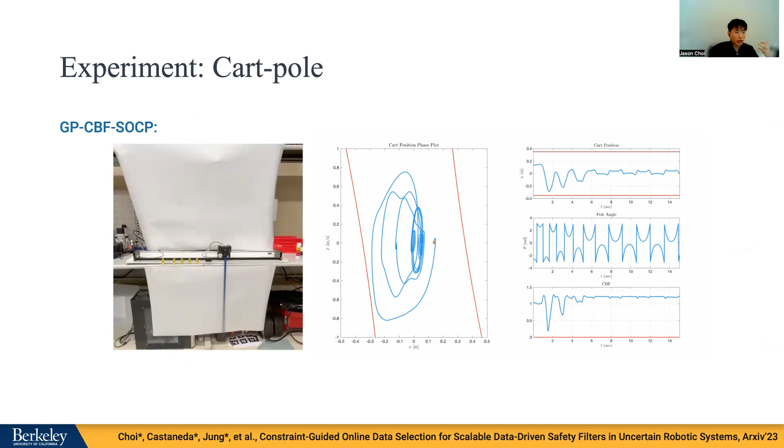Actually, the demo I showed you is using that online data selection, so that it can be executed in real time. For more details, please refer to the papers listed below. The main takeaway from this design is that...

What we did is basically making the vanilla model-based CBF filter adapted to the true dynamics uncertainty, and also robustifying it against the prediction error that the GP model can make. With these two core components, we can guarantee probabilistic safety of the filter, at least probabilistically.

Any questions on the GP filter? No questions.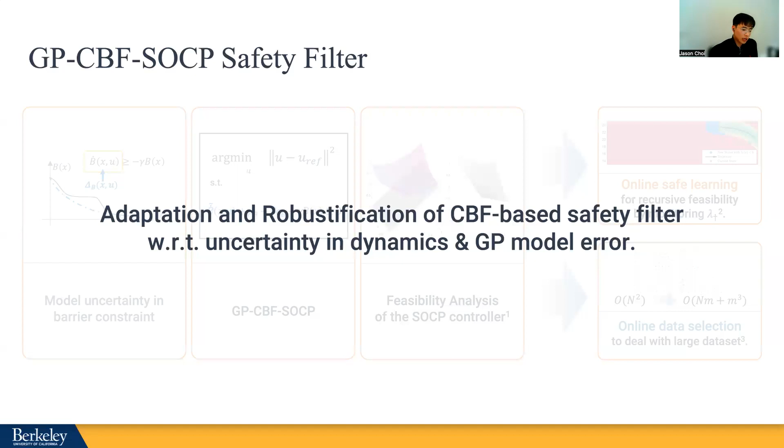Okay, so I paced off a lot in the GP part because I knew it could quite overlap with the previous lecture. But I'll slow down a little bit here now because I think this was the main part I wanted to highlight in today's lecture. This is a recent work I did with an undergrad student who just graduated from Berkeley last winter, Will. So Will and I are the co-first authors of this work. Let's see what we did here.

So I'll go back to the Nagumo condition, the tangential characterization of a control invariant set. Given a function h, if we can verify that at the boundary of the zero level set of h, there always exists a control signal that makes h-dot greater than or equal to zero, then we can ensure safety of the set, or invariance of the set. That was the so-called Nagumo condition.

So the motivating question here is: do we need h to actually design a safety filter, or can we do it without h?

If there's any idea why we might not need H, feel free to speak up. Sylvia, any guess? Why might you not need H in general? Well, I know H can be difficult, but all you want from H is to know the set of allowable control actions. Yeah, that's very good. That's exactly what I wanted to say.

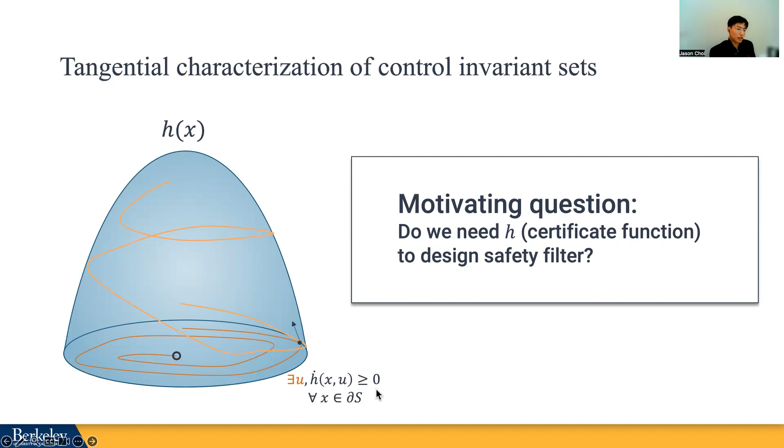So when you think about Nagumo's condition, it's actually not about H. It's about the allowable control action, and this condition doesn't depend on H. So it's a very geometric condition. I'll explain why.

Another motivation, as Sylvia touched on both points I wanted to highlight: certificate functions are such that there can exist multiple candidate certificate functions that are valid. So I think a main caveat of certificate function based methods is that you have so much freedom to choose the certificate function you want to use. I'll give an example here. This is an example I worked on with Sylvia before, for one of our manuscripts, but we ended up not including it. So let's say we want to design a CBF.

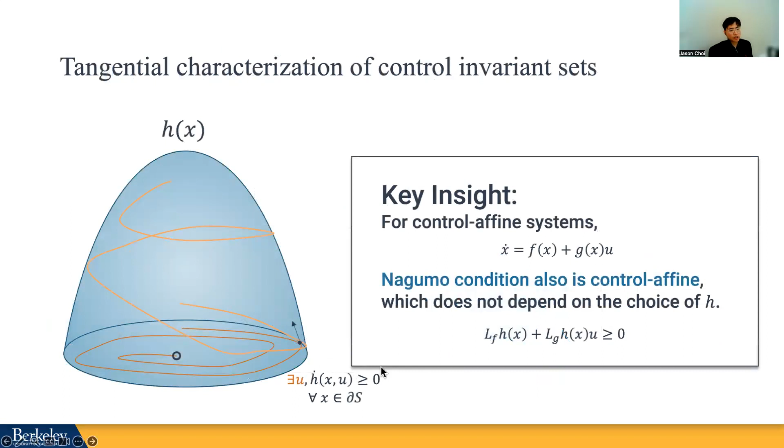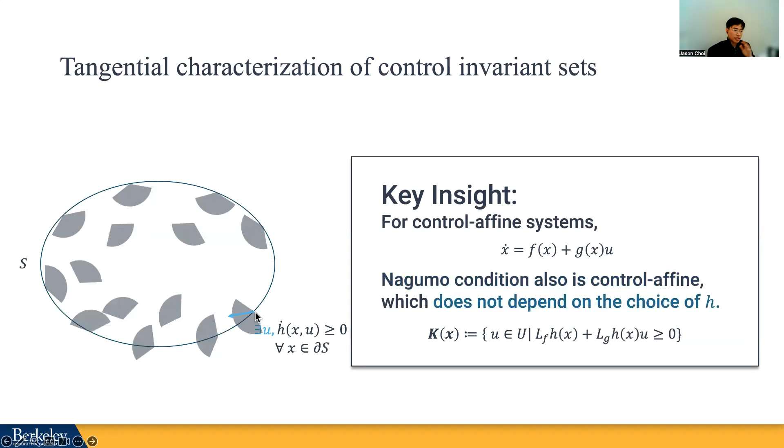So going back to Nagumo's condition, the key insight is that this condition doesn't depend on the choice of H. If you look into the control input space, it's describing a very geometric condition. The cone in the pictogram visualizes all possible directions of the vector field by choosing different U. And H-dot greater than or equal to zero basically means your U should direct into the set.

So for control affine system, this H dot greater or equal to 0 is a linear constraint, right? And this becomes kind of hyperplane-like constraint in the control input space. So let's say you have a control bound like this, U. And then if you apply Nagumo condition, then you're basically splitting the control input space into two different subspaces, one where the control action can be unsafe, and the other part where the control actions are safe.

So basically what we did is define this as a discriminating hyperplane, but also the Nagumo condition only applies to boundary, right? So we can extend the notion of discriminating hyperplane to the entire state space. But basically the hyperplane discriminates the control input space into safe and unsafe control input actions. And such hyperplane always exists for control affine system.

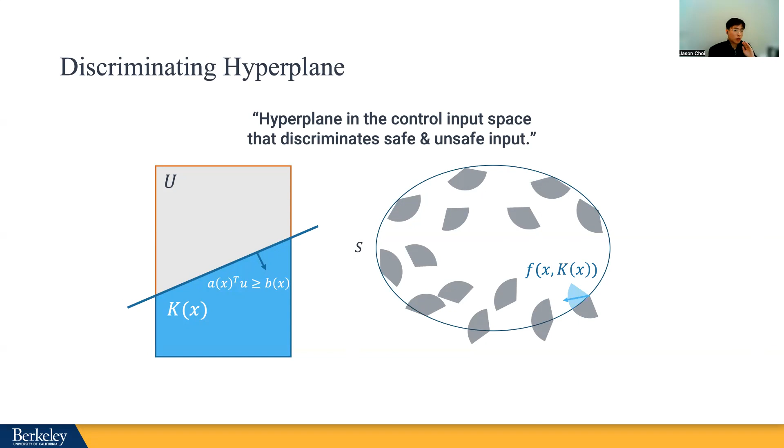And the informal theorem with this hyperplane is that, as long as the control input satisfies this hyperplane constraint, this serves as a sufficient condition for Nagumo condition at the boundary of the control invariance set, and thus it can be provided as a safe control law.

So the key feature is that this is a quite natural extension of Nagumo's condition to the interior of the set. And this also generalizes the Hamilton-Jacobi reachability and CBF-based control law for control affine system. So you can think of reachability-based control law and CBF-based control law as a special instantiation of these A and B values.

So A in the reachability is determined by the value function. In the CBF, A is determined by the CBF. And B in the CBF, you have this comparison function that determines the B. In the reachability, you have 0 in the place of B.

So the nice thing is that now you have this a little bit more generalized definition. When you design the safety filter, you don't have to rely on any notion of certificate function. And this can work together with any type of safe set representation, any way you want to represent your control invariance set. You can use this discriminating hyperplane principle to design your safety filter, or the safety constraint for the filter.

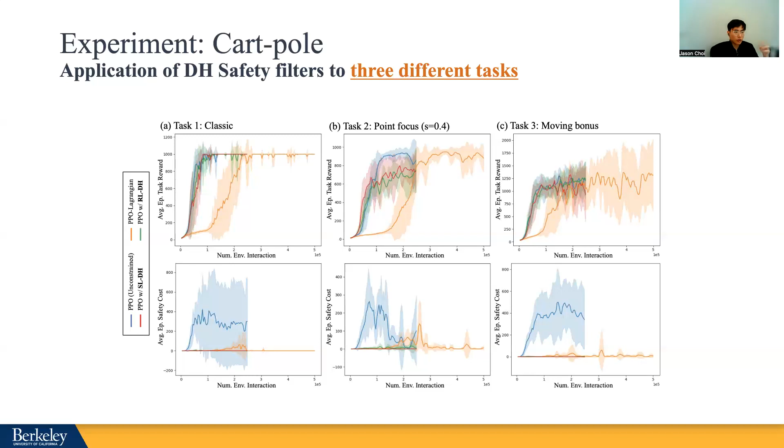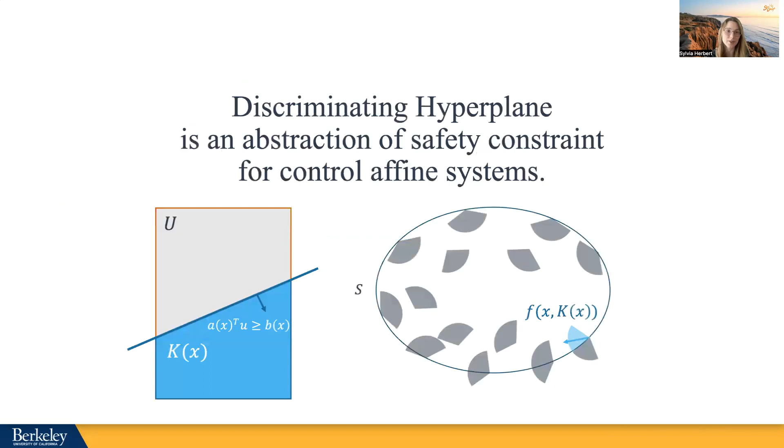So you showed a non-smooth control invariant set for that last example. In general, is that not a problem when you're using discriminating hyperplanes in the same way that it's a problem for control barrier functions? A good question. I am not sure. At least from our result, it was not a problem. But we didn't look too much into the mathematical properties of the filter yet.

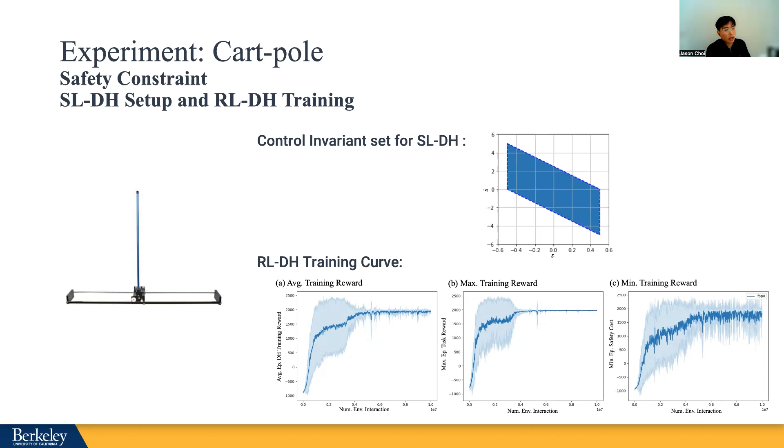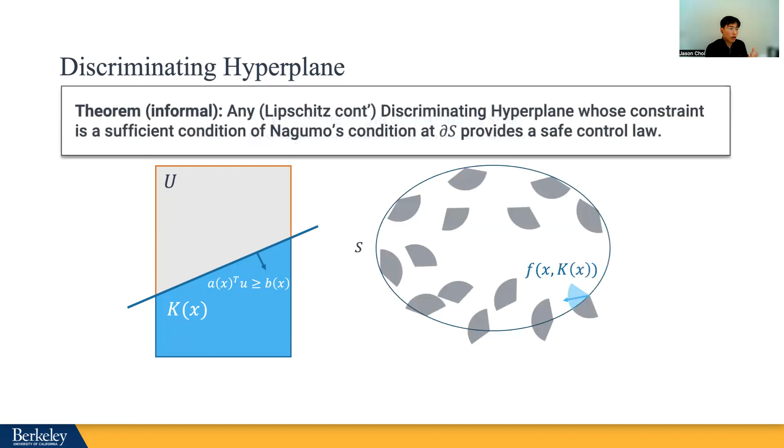But the main theorem we had was proven mathematically rigorously, and the main requirement in this theorem is that the hyperplane parameters, a(x) and b(x), have to be Lipschitz continuous in x. With that, we have the guarantee that the feedback control will be Lipschitz continuous, so we don't have any issue. Whether the smoothness or non-smoothness of the invariant set would affect the Lipschitz continuity of a and b, we have to investigate more. That part is not fully investigated yet.